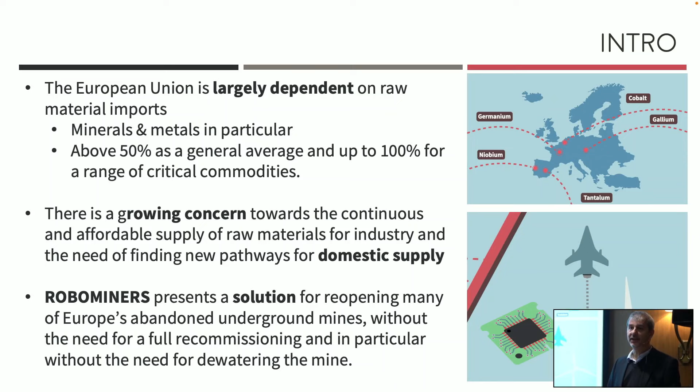I can skip this because if you are here, you know the problems with raw materials in Europe. Just a couple of quotations from the call: we're addressing this call, new solutions for sustainable production of raw materials. Concretely, from the call text, I took this passage expressing the need for very innovative and sustainable raw materials production solutions, to bring the next digital generation to the raw materials field. And that's basically what we have done.

So we want to bring high technology to raw materials, and change a little bit the way mining is seen. It's seen as a dirty and very heavy field, but if you bring technology, robotics in this case and many other technologies, we can provide a transformational effect.

And of course we want to make a different kind of mining, one that's more sustainable and more socially acceptable. We target 3 main scenarios: abandoned mines, small and high-grade mineral deposits, and ultra depth. All these 3 scenarios are, in our vision, not mineable with classical technology, or not economically viable. That's where we want to put robots and technology. We want to send robots where man cannot go, because it's too dangerous, or not economic.

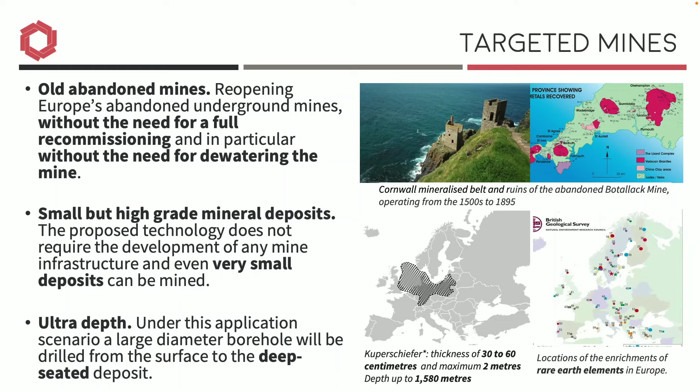So this is the concept we had in mind when writing the proposal. We want to have robot modules - this is a modular robot, modular technology. These modules would be brought into place via a borehole, for instance, depending on the access to the mining site. They would self-assemble. This is a low TRL project, a research project, so some of these things are at a conceptual level.

So, like step 2 for instance, they would self-assemble - we've been working on that in simulation and also with prototypes - to form a fully functional robot. When the robot is fully functional, it will start mining the ore using a specialized sensing device to sense the ore, and a specialized production device. They will produce a slurry. This is supposed to work both in water and in dry environments, but the water environment is most suitable, because we produce a slurry that is then pumped out from the mine using classical technology.

And because they are modular, they would self-reconfigure on the job, which means that in case of failure or different needs, they would change their physical configuration to cope with different situations, failures, or different needs.

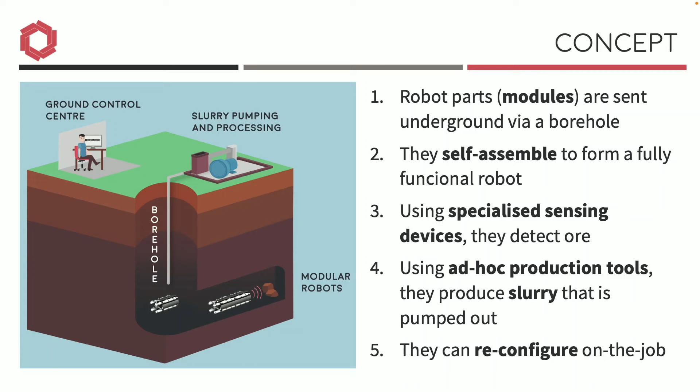So these are the specific objectives: construct a fully functional modular robot miner capable of performing selective mining. I want to stress the selective mining part, because the robot itself is the most visible part, and everybody always fixes their attention on the robot, but the robot is just one of the components. We have many other things inside and outside the robot.

Validate the key functions, not only in the lab - we went a little bit beyond TRL4, because we've done field testing, and also designed and studied the mining ecosystem, meaning we're not only focused on the technology, but also on the impact this technology would have on the whole mining system.

And then use these tools and gadgets to study future challenges. So more concretely, we've been working on robotics, as I said, selective mining, and the mining ecosystem. I'll go through these three topics quickly, because my colleagues after me will show the results in more detail.

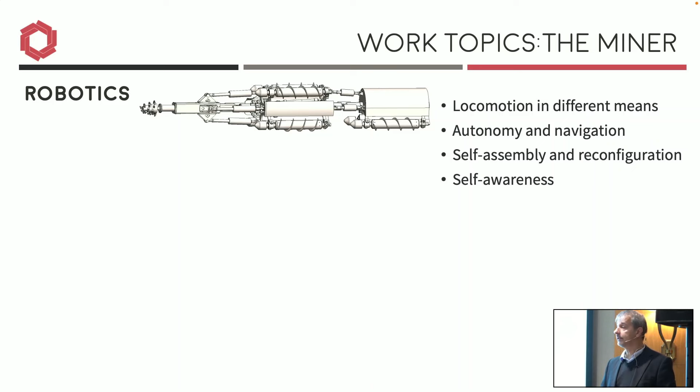So we've been working on locomotion in different means, in harsh environment with innovative locomotion means, autonomy navigation, classical robotics, self-assembly and reconfiguration, and also self-awareness. So we've been producing 3 different prototypes for testing different things. This is the big one, RM1. RM2 is a lab toy, and RM3 is another scale model to test sensors.

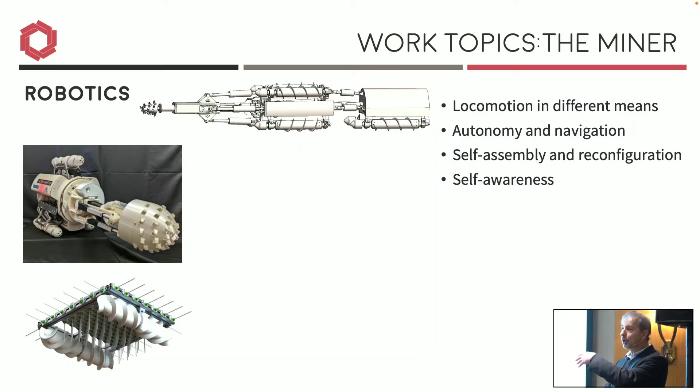What you don't see, well, this is easy because you see it. What you don't see is the artificial intelligence, okay? Because this is software.

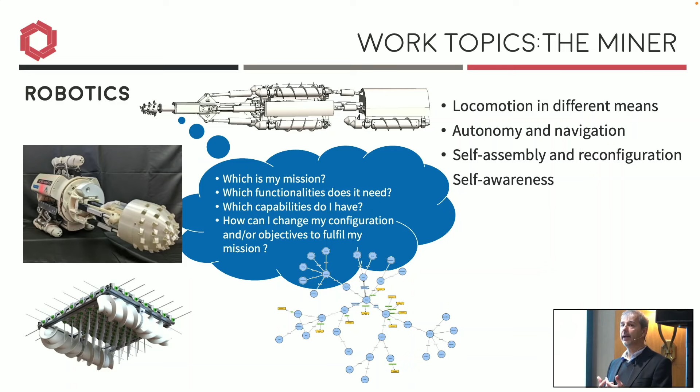So I want to spend 1 minute describing what we are working on as far as self-awareness. Self-awareness means that the machine, the robot, is capable of reasoning about itself, its performances, and understanding which functionalities it needs to perform the mission, what it can do, and how it can reconfigure, or change its configuration to address the needs. It is almost philosophical. It's like who am I, am I doing the right thing, and how can I improve. And this means software and hardware.

So this is a very quick example. It's a log file, so you don't really see it, but what I'm showing you here is that in the picture above, there's one module trying to do mining, and it realizes that it has not enough force to actually dig the rock. So what it does is call for another module to get together, and they form the robot below. There are 3 modules: the production module and 2 locomotion modules, and the 3 of them can perform the mining.

And this reconfiguration is done by the robot itself, because it knows that it's not performing well. It reasons about the capabilities needed and what is around, what it can do, and decides that by adding another module, it can comply with the mission it is supposed to perform. Everything is done by the robot itself, reasoning about its capabilities and the mission needs.

Also, I want to highlight that we are on the borderline between mining and robotics. For us, this is a very big machine, a huge robot. You don't see these big machines, or not as many. But on the mining side, we are almost a toy. This is a very small mining machine, even too small. Actually, the comment we get from the mining industry is always that it is too small. So it's a very huge machine for us, a very big robot, but a very small mining machine, and we are on that border.

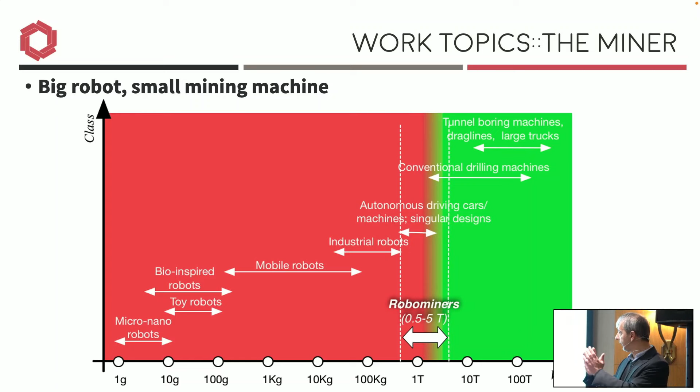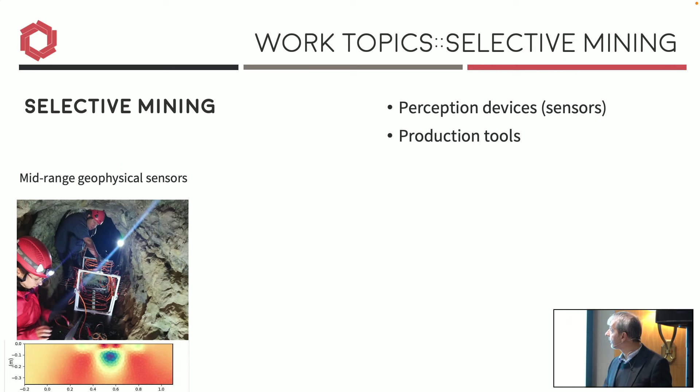Okay, this is about robotics, about selective mining. Let me go a bit quicker because there's a presentation about that. We've been working on perception devices and production tools. So we have mid-range geophysical sensors, mineralogical sensors, and we've been working on production tools. The one you see is the final product, but we've been doing different prototypes and numerical simulation to get to this point.

And finally, as far as the mining ecosystem, we've been working on different levels: mining design, mining strategies, geological modeling, how to integrate the information we have a priori with the information being produced by all the sensors the robot has, to integrate everything in real time to help the robot take decisions. And if this is the case, an operator can also overview and take decisions for the robot. We've also been studying the impact of micro and macroeconomics that this system would have, when it is profitable and when not. And we've made an inventory of relevant deposits, which deposits in Europe would be suitable for adopting this technology. There's many of them.

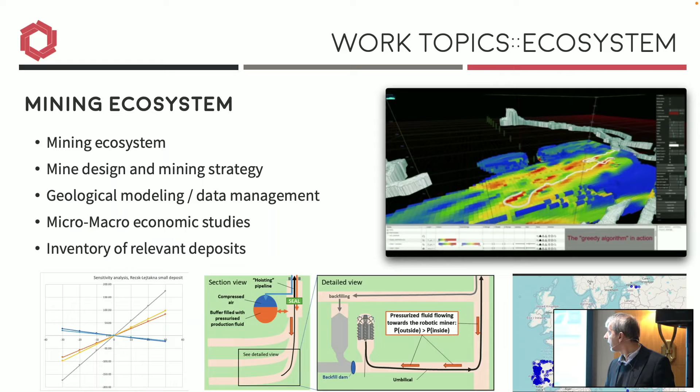And the last thing I want to talk about is the impact. Of course, this is a technology, but which is the impact? So, as I said in the introduction, the whole purpose of the project is to provide Europe with new technology, new exploitation scenarios for mining.

I forgot about that. We want to bring high technology, digital innovation to the mining industry, and we think this can also have a positive impact on the new generation, and in particular help fill the gender gap, because if you see this as a high-tech field, maybe we can encourage young people and also women to start working in that field, to change the image of the field a little bit. Of course, we also want environmental benefits: different mining, low impact, no dewatering the mine if it is flooded, no humans in the mine, less waste, and less impact on the ground.

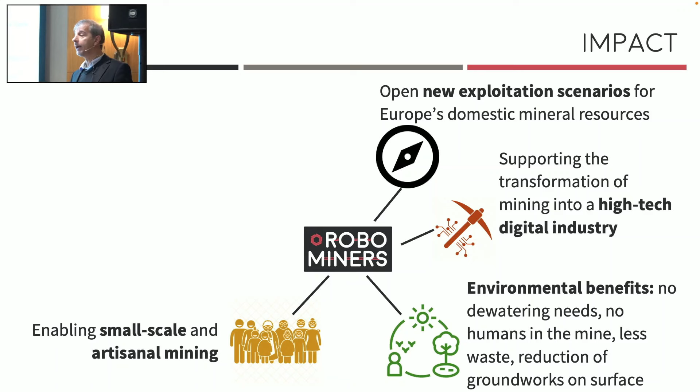We can also imagine enabling small-scale and artisanal mining, meaning these machines are several orders of magnitude less complex and less costly than normal mining machines. This might empower small companies, family companies, artisanal operations, or small communities to perform mining, not just the big companies.

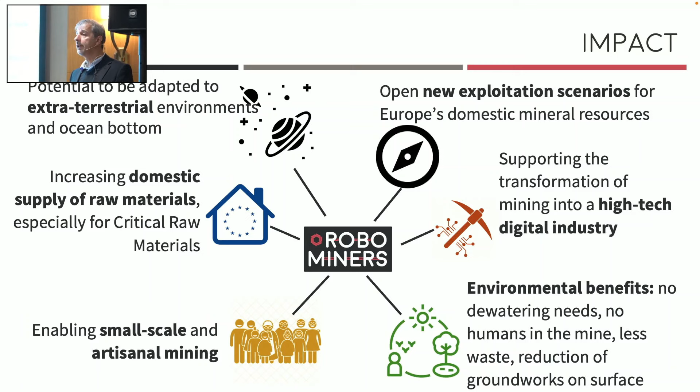Of course, this would increase the domestic supply of raw materials for Europe. Finally, we believe this technology is also suitable for other fields, like extraterrestrial mining, which is a very hot topic lately.

ISRU, in situ resource utilization, for mining asteroids or moons or whatever. Also, as Jussi will mention later, all the technology we tested in the robot is rated to 1,000 meters of depth, so it can go underwater and do mining on the sea bottom up to a certain limit. So that's about the project.

We have our social networks, and now it's time for my colleagues to go a little bit more in depth on the technology.

Thank you. Any question? Maybe take a question. We'll take questions later. Now it's Goran. Okay, thanks.

Thank you, Claudio, for this nice introduction about the project. First, let me introduce myself. I'm Goran Žibrat from the Geological Survey of Slovenia, and I will tell you a few words about our vision of the mine of the future.

You are probably very familiar with this, but I will just quickly repeat it. So why do we need mining? First, global demand for raw materials and energy is increasing, and demand per capita is increasing too. There are more people on earth, and each one is consuming more resources, so we have a double exponential growth at the moment. The variety of resources we use today has increased, so we're actually using the whole periodic table of elements.

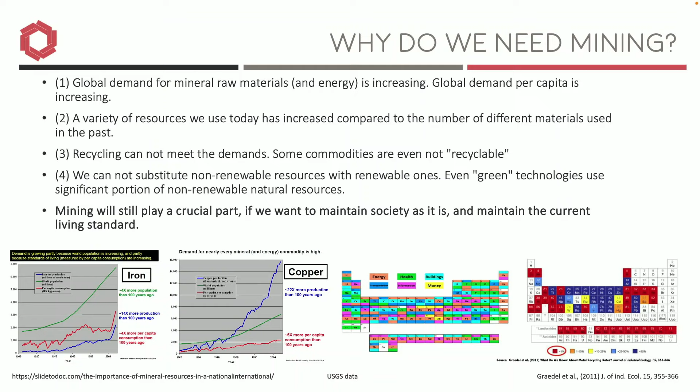Recycling, unfortunately, cannot meet the demands. Some commodities are not even recyclable, and we cannot substitute non-renewable raw materials with renewable ones, because it's impossible. Even green technologies use significant amounts of raw materials. So mining, whether we like it or not, will still play a crucial part in maintaining society as it is and maintaining current living standards.

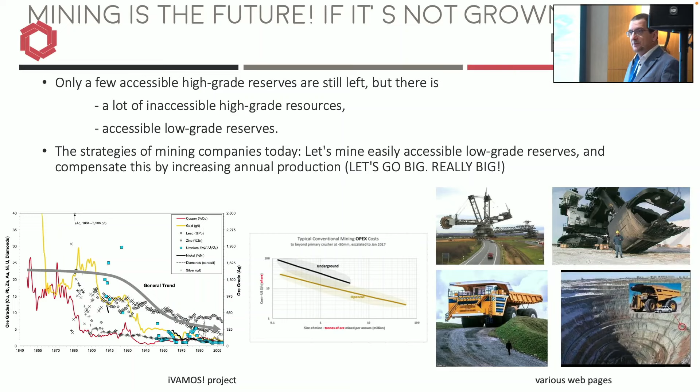Coupled with ever increasing demand for raw materials, the strategy of mining companies is to grow, to get bigger and larger, because the costs are lower. As we see on this graph, if we have a larger annual production rate, it means decreased cost per ton in underground or open cut mining. So now we have big machines, big open pits, big environmental impacts, big everything.

But there will be no depletion of resources. The only question is what will be the price of their mining. So it's clear that mining of the future will also need to occur in areas which are not suitable for humans to go, and which are not suitable with current mining technology, like ultra deep environments, ocean floors, and similar. Mining there will be costly, for sure.

But using robots in such environments can have several advantages. First of all, because there will be no humans in the mine, we can drastically decrease the costs for assuring healthy, safety conditions there. We don't need to cool the mine, we don't need to pump the water out, and so on, which can decrease the costs. Robots can also work around the clock, so they don't need breaks, they don't need to travel to the surface, they don't need holidays. That is, again, a big advantage compared to humans.

Mining can, of course, also scale. Current mining machines are adapted to human size and go big, but robots can also go smaller. There's no need for a certain scale range or size of the machines. Because of this, mining can occur more selectively, generating much less waste and having much less environmental impact. If we use robots in mines, we need fewer people to operate the mine, and we have better working conditions.

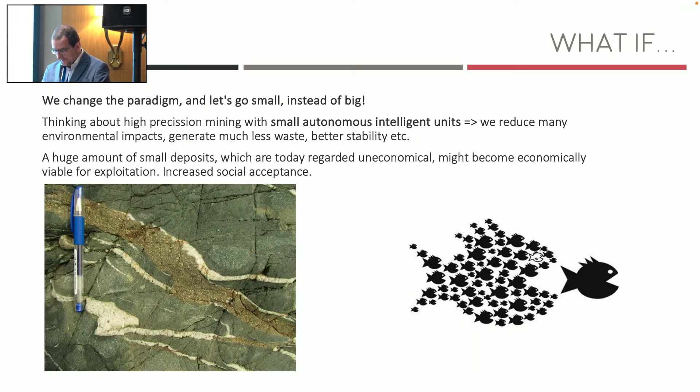So mining is for sure the thing which should be done by machines, not by humans. And I will quote Agent Smith: "Never send a human to do a machine's job," and then we can proceed to our vision of the mine of the future.

So our mine of the future is completely automated. No humans are needed underground. Human interventions are needed, but can be done remotely on a very high level control. Machines are modular, can self-assemble, self-disassemble, self-repair, can replace the worn-out parts. Machines are able to sense their environments, so to distinguish between ore and waste, and are able to make decisions accordingly.

Minerals are extracted very selectively, very precisely in all three directions, not only left, right, forward, backwards, but also up and down. Mine layouts are complex, fractal-like, so they follow the natural mineralization. They don't dig into the parts where it's not necessary, as it is today.

Mining, there is much less need for the mining infrastructure. Mining machines can start digging from the surface, reach the deposit, start excavating the ore. Also, mineral separation and ore beneficiation is being done underground with in situ backfilling, so we have much less waste on the surface. Only ore concentrate is transported, or even maybe we can also merge downstream industry like metal processing or metallurgy to this mining system of the future.

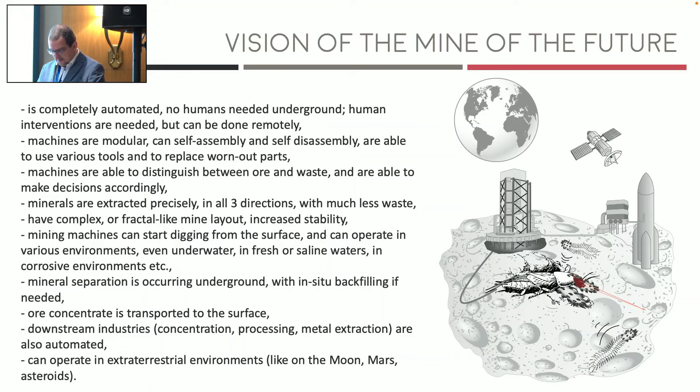And of course, when we have this system, it can operate also in every kind of environment we have, in the space. So there are many technological challenges to reach this stage. I will not dig into the details, but I will only mention the most significant ones.

The first, of course, is energy supply, whether to have batteries, some future fusion or whatever reactors, or have a cable attached. Then motoric and locomotion, how will the robot move? With legs or with tracks, with wheels or with some other means of propulsion.

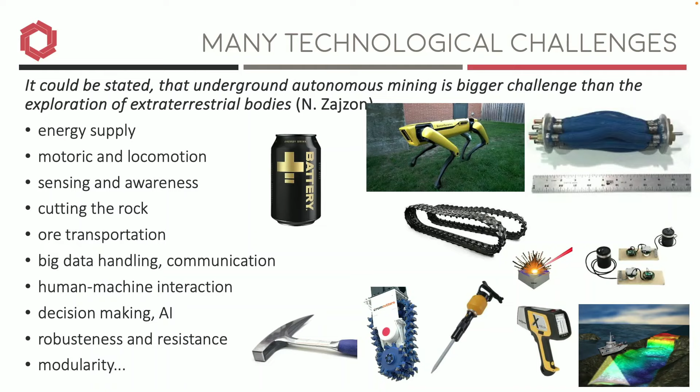Sensing and awareness, so the machines will need to sense the environment, and also in very harsh conditions with zero visibility, in slurry or similar. Cutting the rock is another challenge, it consumes enormous amount of energy, and you need also to assure the back force. Then ore transportation, big data handling, communications between the robots, between the robot and humans, human-machine interaction, decision-making, robustness and resistance, and so on.

So the man who moves the mountain begins by carrying away the small stones. So there are various solutions which tend to reach this vision of the mine of the future with small steps.

Right now, there is a lot of things done regarding automatization of certain tasks in mines and remote control of the machines, with coexistence of humans and machines. Mainly in the excavation phase, which is the most dangerous place in the mine, a lot of work has been done regarding sensors and merging all of this information into virtual reality environments, which can help operators of these machines to do their job better.

I named some of them. There are many more of them, like VAMOS project, UNEXMIN, Sandvik AutoMine system, Soil Machine Dynamics did a lot of work related to mining of the ocean floor. There is Korean KRISO underwater mining machines, these spiders which collect the nodules, and many more of them. But also ROBOMINERS, we think, is a big step forward towards our vision of the mine of the future.

So I will finish with this general presentation, with this general vision of the mine of the future. But I will now have 4 more slides to present some less technical aspects of the ROBOMINERS project, because in further presentation you will see the very technical stuff.

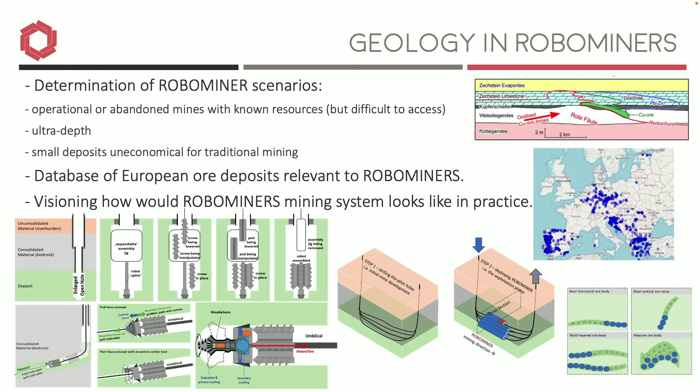We did a lot of thinking about how to proceed, roadmapping, what steps do we need to reach our vision, to have first commercial operations by 2030, and to have the whole system developed until 2050. Where do we get funding, and so on.

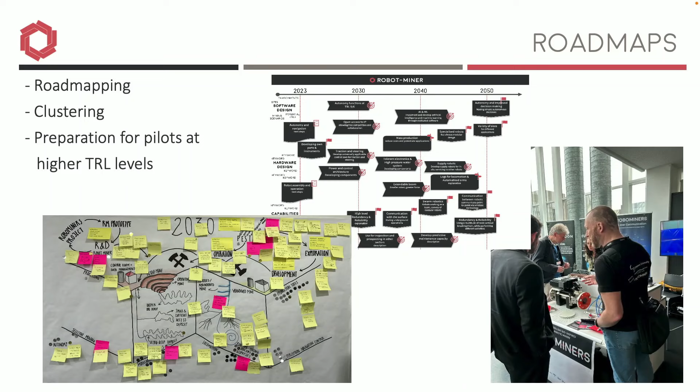We also did a preparation for pilots at higher TRL levels. We also did some work regarding, as Claudia mentioned, the economics, the environmental impact, the social impact, and policy impacts.

With macroeconomic investigation, we thought about the general economic situation, like for general deposits, these three deposits we were mentioning before. We saw that critical parameters are price of the ore, obviously, productivity, uptime, and initial investment costs for the infrastructure.

In the next step, we went into detail on three actual deposits with actual data, and determined what happens if we use the robotic system there: what are the advantages, disadvantages, or what are the critical points. We again identified the critical parameters for lead zinc.

For one deposit in Portugal, it's cost of the borehole. And for the other two scenarios, copper, silver, and epithermal gold, the cost is actually price of the ore.

So to conclude, we determined the main advantages of this robotic mining are the ability to perform selective extraction at all kinds of scales. The next advantage is minimal surface and underground infrastructure needed, unmanned underground operation, and shorter time to access the deposit compared to conventional mining.

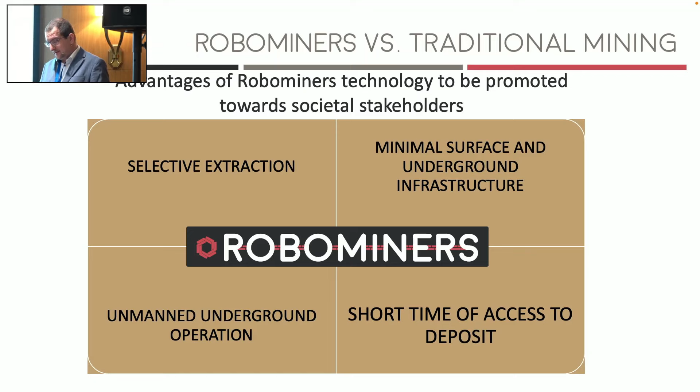So thank you very much for your attention. I'll finish this with the miner Prometheus installation from Slovenia. It's ROBOMINERS, but it's not moving - it's only for artistic purposes. Thank you.

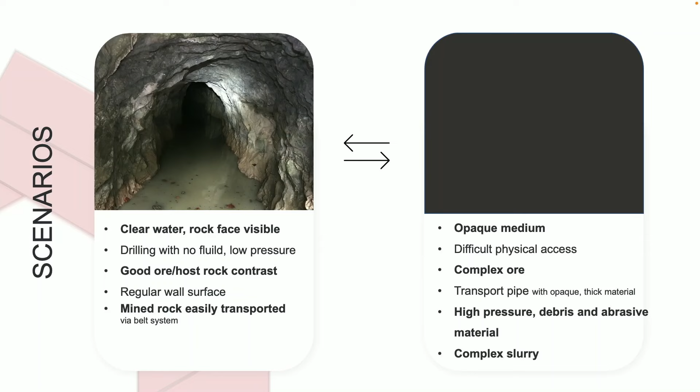So we can visualize the obstacles and the mine walls. We can use this type of sensor where conventional sensors do not work and there are few or no reliable landmarks.

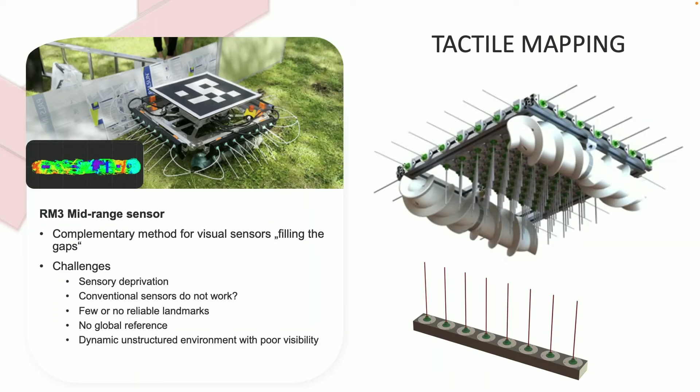Once we know what's on the surface of the wall mine, we want to know what's inside as well, so how far these veins are developing inside the wall mine. To do that, we thought about two different types of application with ERT, electric resistivity tomography.

Here in this first case, you see the lab application of piston-based electrodes that we mounted on the RM1 platform. We used pistons because we wanted the electrodes to be autonomous, so we could retract them when moving and during drilling operations, and then re-extract them when we wanted to take actual measurements. Here you see them in a classic linear setup, but on the robot they are displaced all along the body, using an irregular electrode spacing for 3D environmental mapping.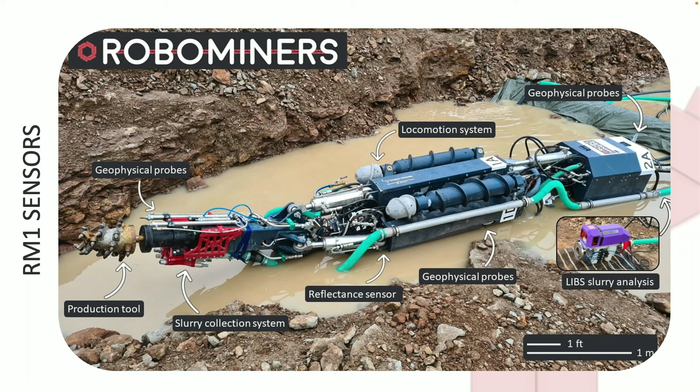When they open, the direction is like two antennas of insects. Then we have another couple here mounted on the belly and in the back as well. What else? We have the reflectance sensors on the bottom of the first module to check a bit on the slurry and on the composition of the bottom floor. And then, as you can see here along the way, we have the slurry analysis system. This is it for the sensors.

It was a very quick overview, so if you have a question, just pop them up later. Thank you.

Okay, thank you. Hello everyone, my name is Michael Berner. I'm working at the University of Leoben, and our part in this project was the production tool.

Today I want to briefly present you all the tasks related to it. So just to give you a quick overview, we have several production tools which are probably feasible or need to be analyzed in the beginning, which might be capable of being used in future mining robots. For that, we made this huge applicability assessment in the beginning, with great theoretical studies with numerical simulations of excavation processes, just to define some application limits and minimum requirements for production tool systems and for the robots, of course.

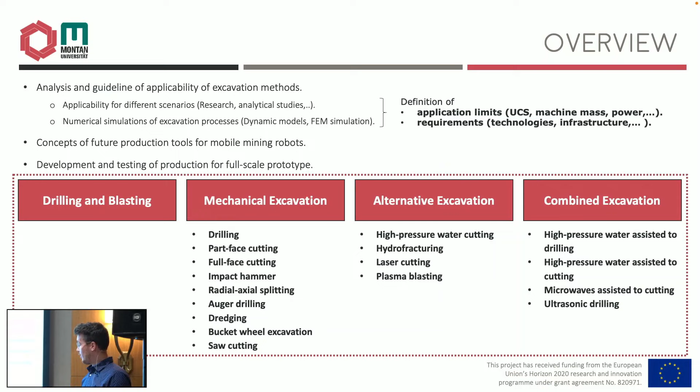The second major part was the development and testing of a production tool suitable for our prototype. So that's basically the two main tasks: one is the theoretical simulations and assessment of all the futuristic and potential production tools for mining hard rock in a continuous way, probably, and the second one is developing a suitable excavation tool system for our robot prototype.

And that's where the real challenge was, because on the one hand, we needed a production tool which was able to excavate rock in a more or less continuous way. On the other hand, we have the limitations of the robot - it is very lightweight, has a very low amount of power, and that means the maximum strength of the rock to be excavated could only be really low. So that's where the challenges began.

As you can see here, we decided on a part face cutter head because it was more or less feasible within the time range, and it helped us implement a tool which could continuously excavate soft rock. With that continuous excavation, we were able to transport the material with our slurry collection system and analyze it in stream. Now I want to quickly show you what we did with this production tool.

In the beginning, we had to test it to find the limitations and set the boundaries and minimum requirements for the team, for the structural development of the robot.

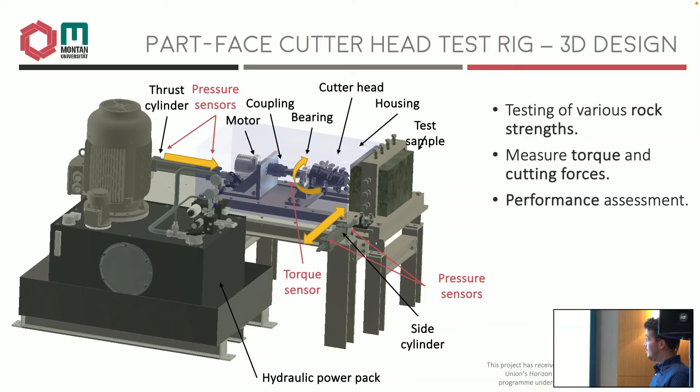We created this full-scale cutter head test rig to test various rock strengths, measured the cutting torques and cutting forces, and did a performance assessment just to get a feeling of what is possible with it and our robot. This was the test rig in the lab.

We tested several rock strengths from 16 to 30 MPa, and also 60 to 70 MPa of UCS. The sample was mounted here in the front in the sample cage. The cutter head here is rotated, powered by a hydraulic power pack with approximate power of 18 kilowatts.

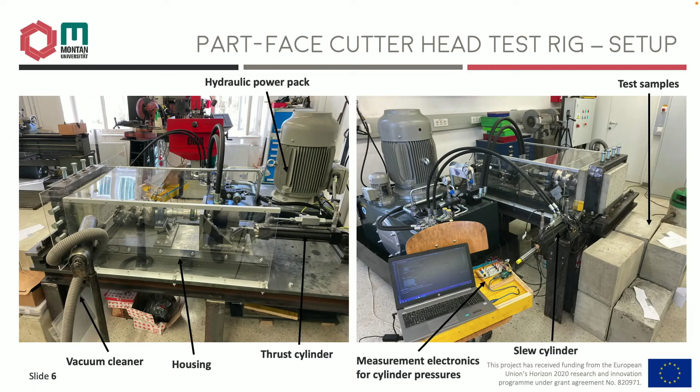How did it work? We had this thrust cylinder in the back, pushed it inside the rock sample. Once the cutter head is inside the rock rotating, we pulled the slew cylinder and moved the probe from left to right, just to imitate the cutting motion. All of the measurements - torque and force - had been done with some low-cost Arduino systems, and of course we had some novel dust emission suppression system with this old-school vacuum cleaner.

What tests did we do? We had three different rock strengths to be tested because we already knew that the maximum UCS to be excavated must be really low, and we concentrated more or less on the region of 20 to 30 MPa rock strength. We also had real oil shale samples from this open pit test mine, because at that point we already knew we might test it in the Estonian oil shale mine, and that's why we tested those also.

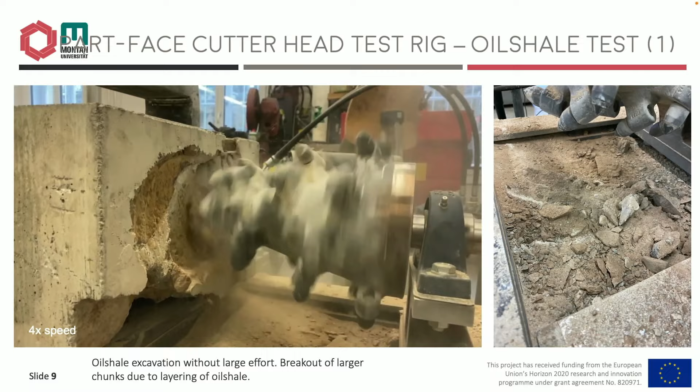So we can see here a video - this was one of the last tests where we tested the oil shale. Only a very small part of the cutter head is in contact with the material, but we clearly see that it is no problem.

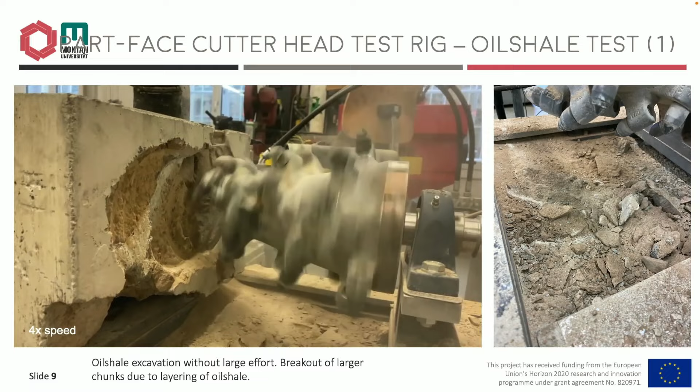It is no problem to excavate this oil shale material here. But on the other hand, as we can already see in this part, we have all kinds of different grain sizes which need to be transported away.

And this can be better seen here, which gave us the limitations or the boundary conditions for our slurry transport system. You can see here, because of the brittleness and the rock being really fragile, our grain size distribution was very irregular and uneven.

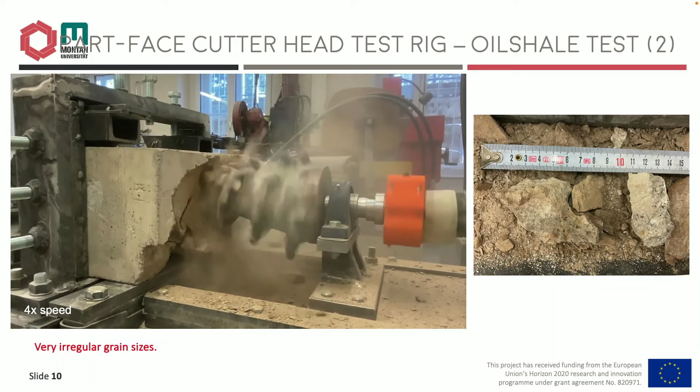And after that, we could do some kind of a performance evaluation.

I just want to say what Claudio mentioned earlier, that we're here trying to combine robotics and mining. Conventional mining machines have high productivity, they can mine hard rock, but that's not the way we wanted to go. This is not about productivity, this is about testing different technologies together in combination, and we did not promise any new production tool here. That's why we'll come to that.

Numbers here: we have estimated excavation rates of about 1 cubic meter per hour for oil shale, which in mining terms is next to nothing, but on our scale it's quite a lot. This gives us a hint for the future that we need some different alternative production tools for mining hard rock.

Could be alternative systems like drill and blast, just to be able to go into hard rock directions for special scenarios. In our case, we did all these tests and we knew for our robot the maximum UCS is around 40 MPa, which is really soft rock material, and that's one reason why we decided to test our robot in Rakvere in Estonia, in this oil shale mine.

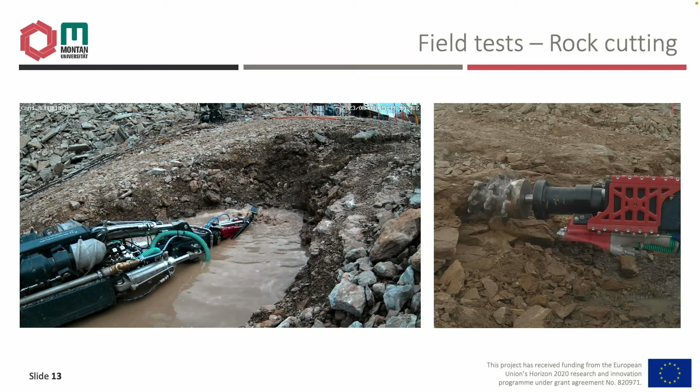And I want to show you those two test videos where we tested the rock cutting capabilities. One was the submerged cutting to test the material transport, and the other one is the dry cutting test. You can see very easily that excavation of oil shale was no problem with that machine.

That's it from my side, from the production tool side, and I'm happy to answer any questions. Thank you.

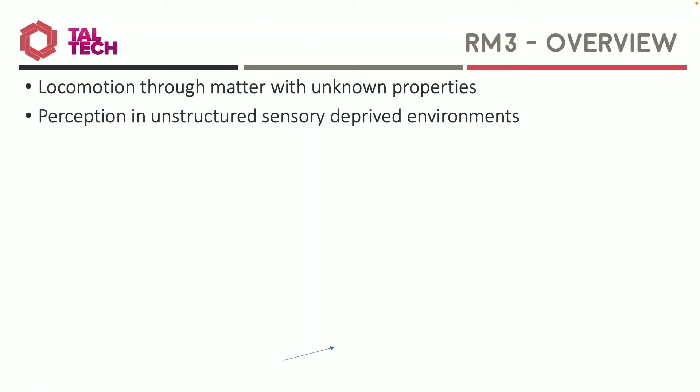Our research questions, to start, were two. How can we locomote in environments whose properties we really don't know? And secondly, how can we perceive the environment, and how can we localize ourselves and map the environment, which is sensory deprived, meaning we can't really use conventional sensors like cameras or lidars? So what can we do for that?

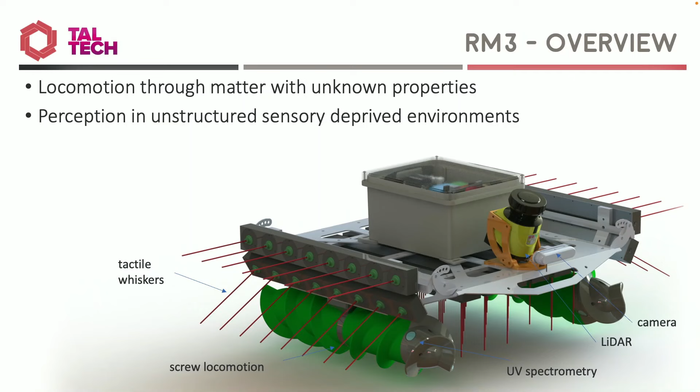We basically ended up with this sort of robot. For locomotion, we decided to go with screw locomotion due to its simplicity and robustness. And for sensing, we were investigating bio-inspired sensors, mainly tactile whiskers on the robot. We combined them, of course, with conventional sensors to investigate their performance against the state of the art.

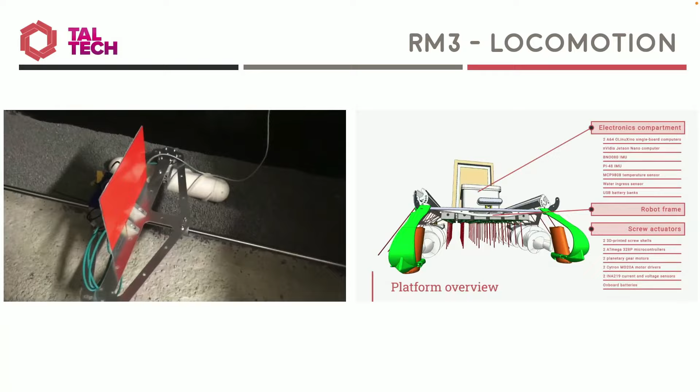Now I will show you the developments over the phase of the project. We developed the screw locomotion in lab-scale experiments and continuously developed it further to be applied in the field. We developed dynamic and kinematic models for these kinds of robots, to be later applied on the RM1 prototype that the Tampere team was developing. This was the first step toward developing robots that can go around in mines, because we needed to first have the locomotion part done, and then we could add sensors to that platform and investigate how we can sense the environment.

Continuing, with this platform we were mainly focusing on mapping and localization. This robot was like a hedgehog, it had a lot of whiskers all around it. By having those whiskers, you can create a point cloud just by touching things on the ground and on the walls, so you can create a map, which is a kind of limited view, but that's okay because we are inside a mine.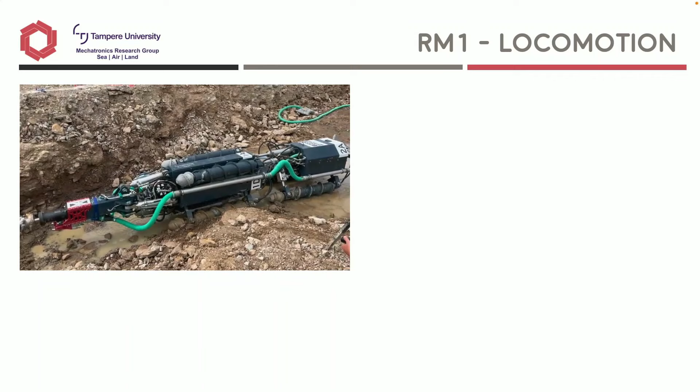And secondly, the robot also has screws able to move in and out from the robot's body. So in case we are inside the mine or have excavated a path with the robot, we can use these screws to fix ourselves to the walls to have more support for drilling.

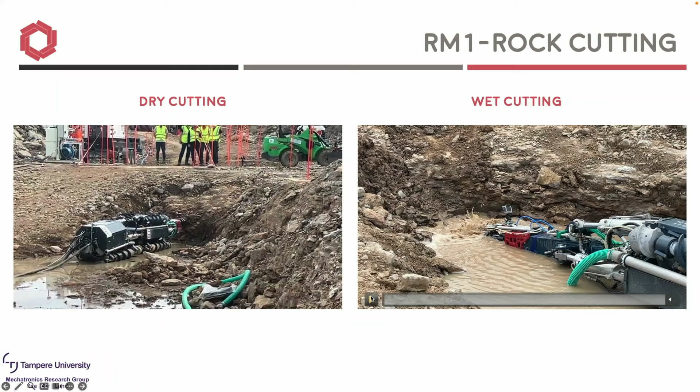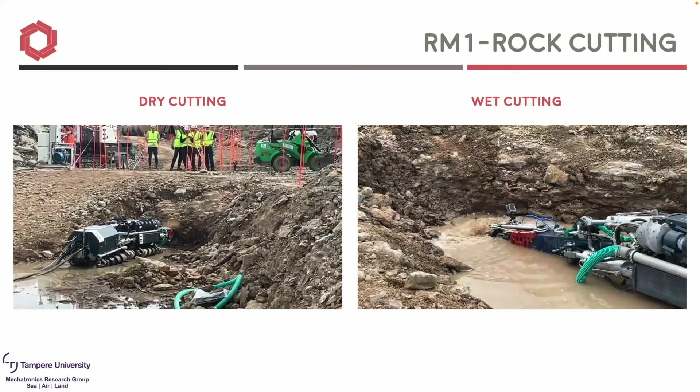And finally, as Michael was already showing, we did experiments with the production tool, first in dry conditions to visually inspect how the tool was working, and then in submerged conditions to allow also the slurry transportation and online analysis of what was dug out.

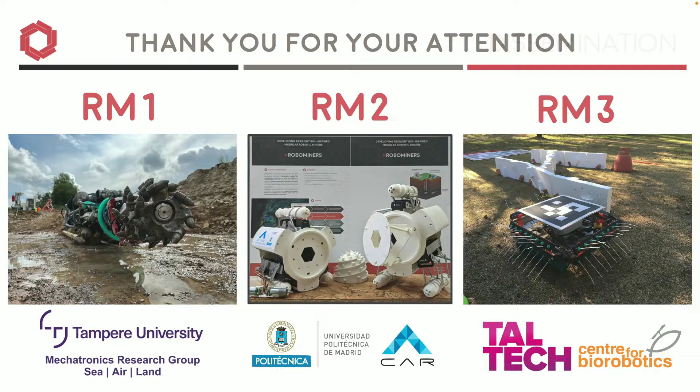So that was very shortly about all the developments. There is much more to talk about, but we can do that later after the session. And finally, a few publications are already out there that you can find, but there are many more to come after the end of the project.

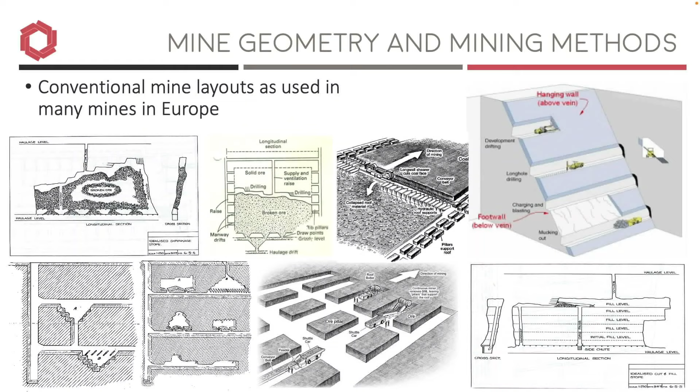So this is the key issue that we've been addressing in ROBOMINERS: not only smaller and more intelligent mining equipment, but also adopting a new approach to mine development.

So one of the things that we looked at was the modelling approach for the geology and the mine openings, with particular attention to the need to transfer the model knowledge to the mining robots.

We very early decided that the conventional cuboid block modelling was not going to be appropriate, and developed tetrahedral block modelling, which integrates well with the geophysical and engineering simulations, the geophysical exploration that Georgia was talking about, and with engineering finite element modelling. It also lends itself to function-based modelling for efficient loading into the robot memories.

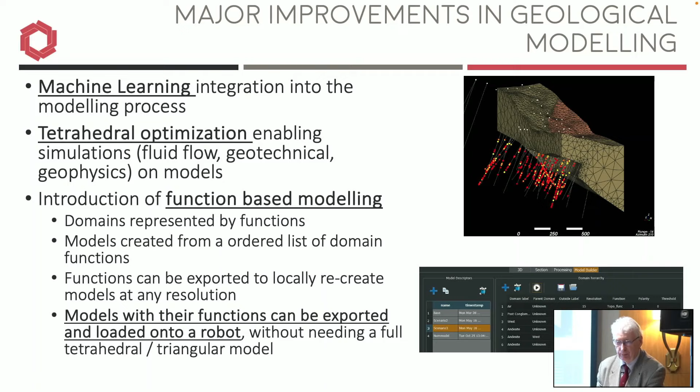We then addressed the mine design and mine layout. Conventional mining using rectilinear tunnels and drives involves a lot of extraction of waste rock. So we took our inspiration from biological systems, and in particular looking at trace fossils of feeding patterns of worms and other burrowing creatures.

And that gives us new ideas for mining strategies. Of course, every deposit is different, so any strategy adopted must be adaptable. It must evolve as a biological system evolves. It could probably be condensed into one phrase: we can learn from worms.

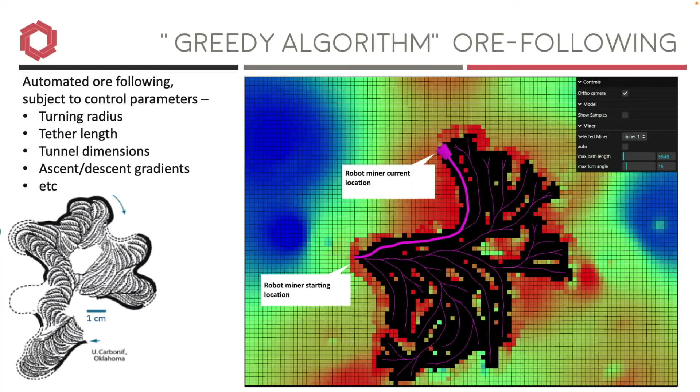We used public domain data from the closed Lisheen mine. Now, let's see how we can get this started. We've used public domain data from the closed Lisheen zinc mine in Ireland, and we've simulated how this algorithm might work in 2 or 3 dimensions. Is that going to work? Yeah.

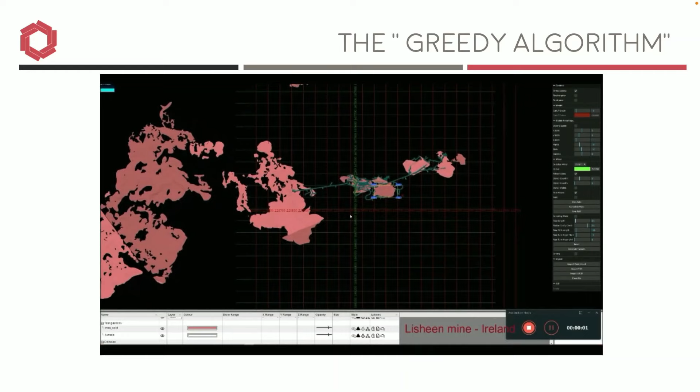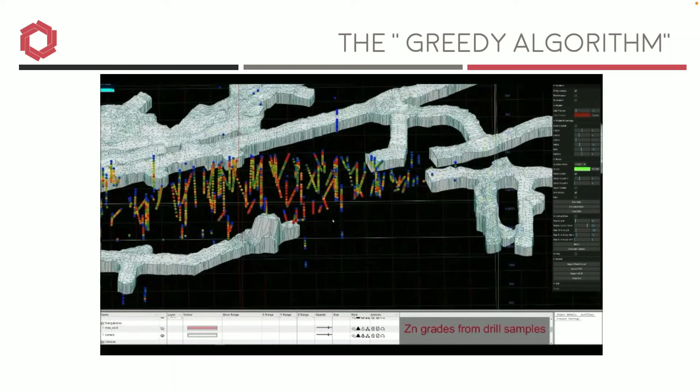The grey-green are the existing surveyed mine workings. The coloured section is drill hole data.

And then using short-range sensors, these perception devices, the robot can start developing the mine, and it'll then continue automatically to extract the ore deposit, mining a minimum of waste. Okay, here it looks like it's gone wrong, but it soon finds its way back.

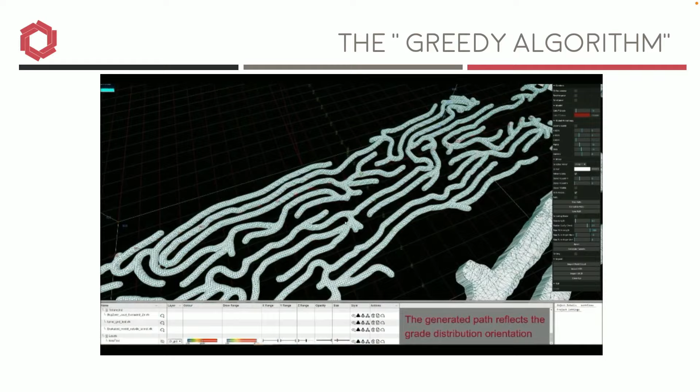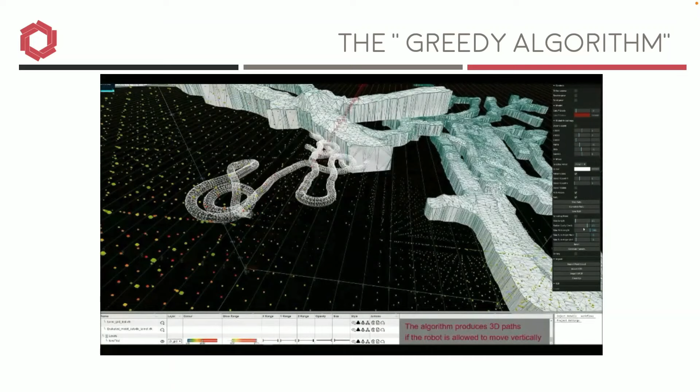That's in 2 dimensions, but the algorithm works just as well in 3 dimensions. And so this is how it has produced a 3-dimensional mine layout. The graphics are different, but the algorithm is the same. And it produces a network of mine workings that are completely unlike any conventional mine. So that's how it's extracted the minerals from a massive deposit.

Okay, and then we moved on to integrate the geological mine model with the engineering. So we're combining the geological and mine layout with the engineering of the robot itself, and we can simulate this.

Don't try to read the captions because we've sped up the video. Kaloyan developed that video for us, and it took rather too long, so we're running it fast. That shows how the robot actually moves in the mine. This is simulating what the engineer would see in the control room of a ROBOMINERS mine. So it's not just a simulation of how a mine might be developed, but it's what you might see on the screen of a mine using ROBOMINERS.

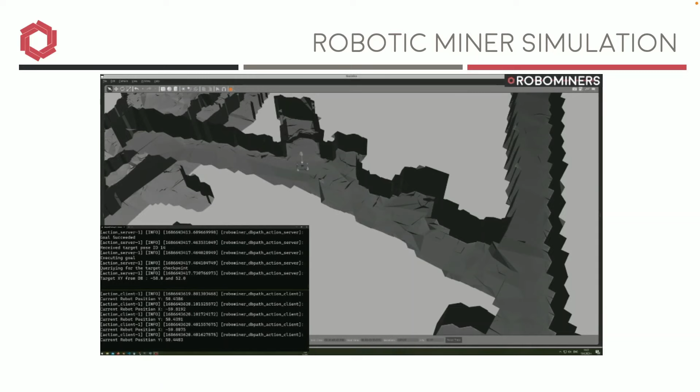The robot there is a modified RM3, as Asko was talking about. It's a little robot, not the RM1 full size. The terrain again is the Lisheen mine. The tunnels that it's working through are the actual Lisheen tunnels, so they're full-scale tunnels for big mining equipment and people.

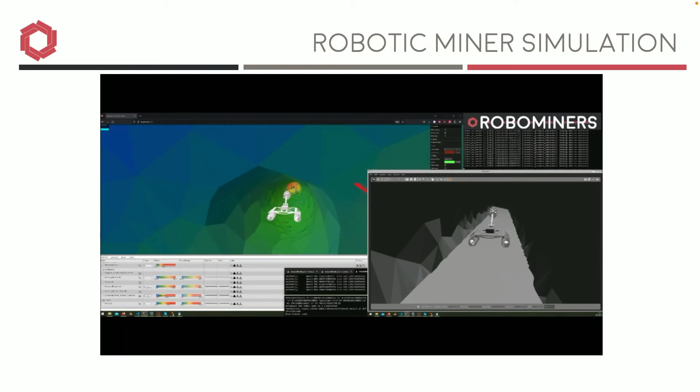The data are held in the robot, so if it runs into a dead end and has to retrace its steps, or if it develops a fault, it has a memory of everywhere it's been, and it can reverse precisely to its starting point.

Okay, thank you. That was a quick overview.